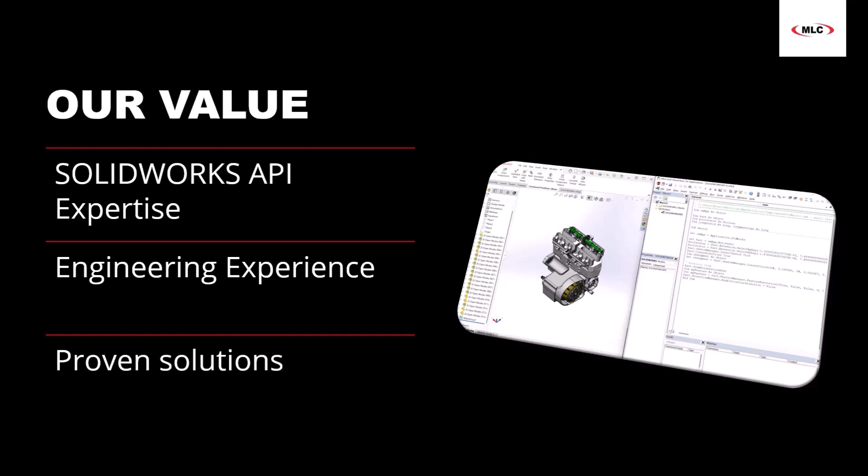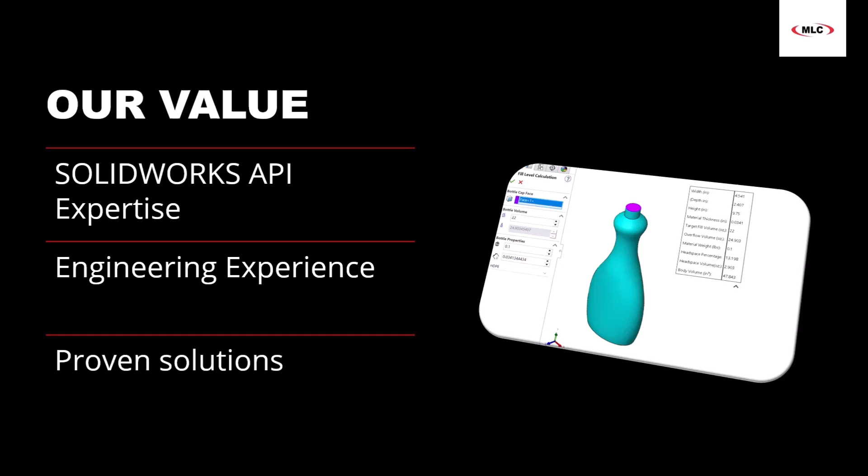At the core of each of these services is a deep understanding of the SOLIDWORKS API backed by extensive database management and software development experience. We don't just build software, we create robust, scalable solutions that align with how your business operates. Ultimately, we're here to help you work smarter, not harder.

When we begin any new project, the first step is setting clear expectations, and this involves a few critical components. Right out the gate, we work with you to determine if there is a proper fit by aligning our capabilities with your specific needs and challenges.

Next, we define the problem clearly. This step is essential to ensure that everyone is on the same page about the goals and the desired outcomes.

Evaluating the ROI potential comes next. We assess the business value of the project to make sure that the investment will bring measurable benefits.

Finally, we aim to build a strong foundation through transparent communication. This is where we establish trust and set the stage for a successful and collaborative partnership. Together, these steps help us create a well-defined path forward and ensure that your project starts on solid ground.

Once we've established a solid foundation, we move into the discovery and alignment phase. This phase is critical to ensure our approach is tailored to your needs. During the needs assessment, we gather all necessary information to understand your current processes and challenges.

Goal alignment allows us to ensure your project goals match your business objectives, setting us on the right path. Defining the scope and objectives involves clearly outlining the project deliverables, timelines, and responsibilities.

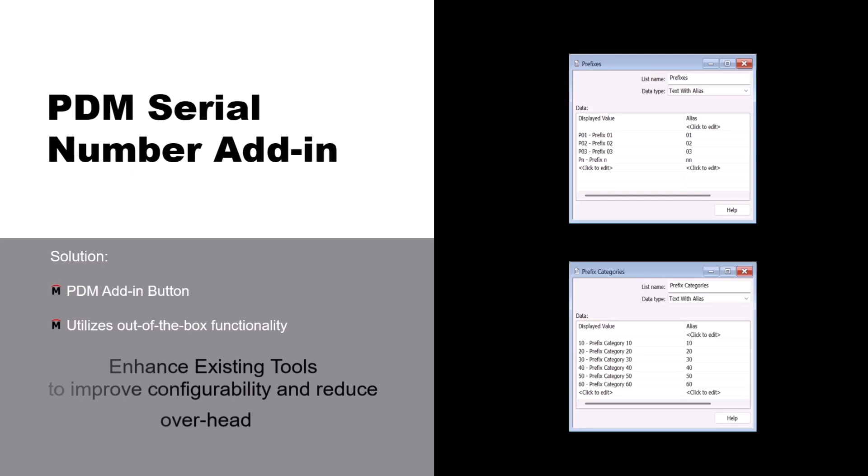We've designed the add-in to take full advantage of out-of-the-box PDM functionality. Instead of relying on fully custom implementations, we extend PDM's existing tools to improve configurability and reduce maintenance overhead. By using PDM's built-in list structures, administrators can easily update and manage the prefixes without having to modify code or mess with configuration files. Admins can adjust numbering schemes directly within PDM, allowing the system to evolve with business needs. Updates are made through the PDM UI, eliminating the need for database modifications or custom programming. By leveraging native PDM functionality, this ensures seamless integration and minimal user training.

A critical advantage of this approach is that it's scalable. As your organization grows, numbering needs may change, but this system can easily adapt without requiring additional work. Since the prefixes and categories are managed using PDM's built-in card list, making changes is simple. If a new prefix is needed, an administrator can update the card list directly in the PDM admin tool, and the new option will be immediately available to users. There's no need to code the updates, so new categories can be added at any time, and changes are applied instantly. Each new prefix in this solution will start a new unique counter for that prefix value.

Moving on to another PDM add-in, this solution is focused on streamlining the engineering change notice process, and we do this by leveraging PDM's task functionality.

Administrators can define which properties get mapped as well, and this allows for flexibility with different ECN requirements. With this level of automation, the ECN documentation remains consistent, accurate, and easily traceable.

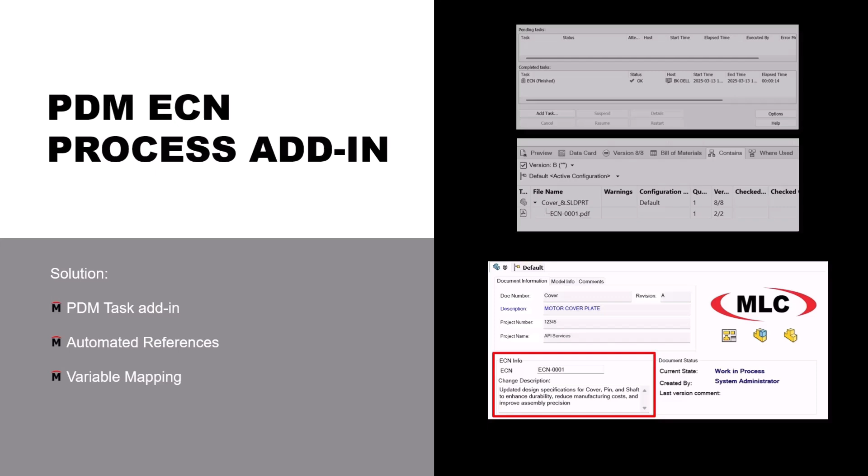By integrating PDM tasks, automated references, and variable mapping, this add-in streamlines engineering change management while reducing the risk of errors.

Now, the last add-in I want to introduce today is a SOLIDWORKS add-in that was designed to streamline a design workflow.

When designing bottles and containers, the volume capacity is a critical specification. Whether it's for beverage packaging, pharmaceutical containers, or even industrial storage, companies must ensure that their designs meet exact volume requirements while optimizing material usage and manufacturability.

Accurately calculating the internal fill volume of bottles and containers is a pretty critical task for the design engineer. Understanding exactly how much liquid the design can hold is essential. And unlike mass or surface area, internal fill volume is not a built-in one-click property of SOLIDWORKS.

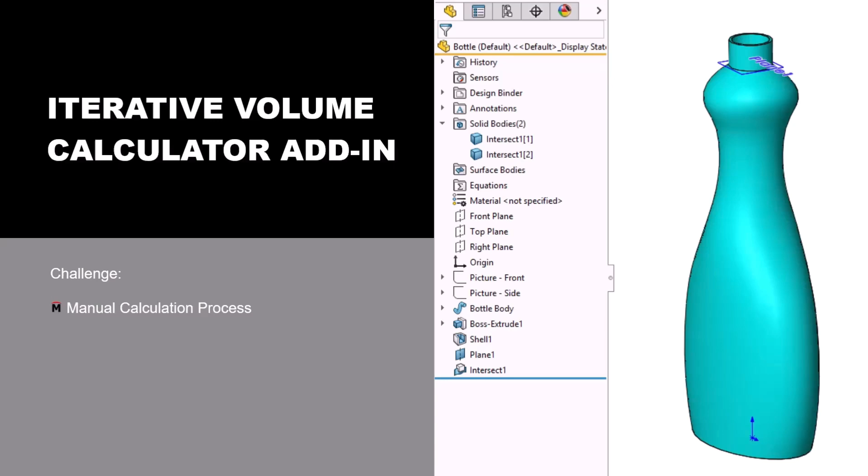Now, you might be thinking, well, what if I use a shell feature, create a thin wall version, maybe use an intersect feature, and we can kind of isolate that internal volume. You can even attach a sensor to it and report back the volume of the remaining body.

But in practice, bottles often feature organic curves and tight radii, which introduces small minimum curvature radius values that make traditional features like shells unreliable. And if shelling fails, users must attempt workarounds such as offsetting surfaces. It gets kind of messy, which adds unnecessary complexity and really slows down those design iterations.

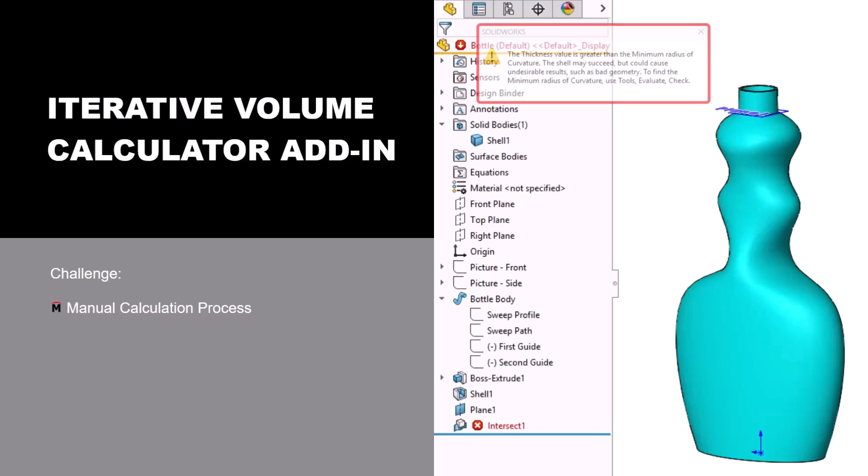With shelling out of the equation, the next option might be to manually calculate the volume using external tools, such as spreadsheets or even equations. However, this approach does have some drawbacks. Transferring data manually introduces the possibility for mistakes that can result in inaccurate volume calculations.

Which leads to the next challenge in bottle and container design: handling frequent design changes. Design engineers often iterate multiple times before finalizing a shape, adjusting factors like aesthetics, manufacturability, and capacity. However, each of these changes requires recalculating that internal fill volume, adding time and complexity to the design process.

With every design modification, users must manually extract dimensions and update external calculations, and that can really significantly slow down the iteration speed. And if changes are not carefully tracked, previous calculations may no longer be valid, leading to incorrect volume estimates. Since manual calculations rely on user input, every adjustment introduces one more opportunity for data entry mistakes.

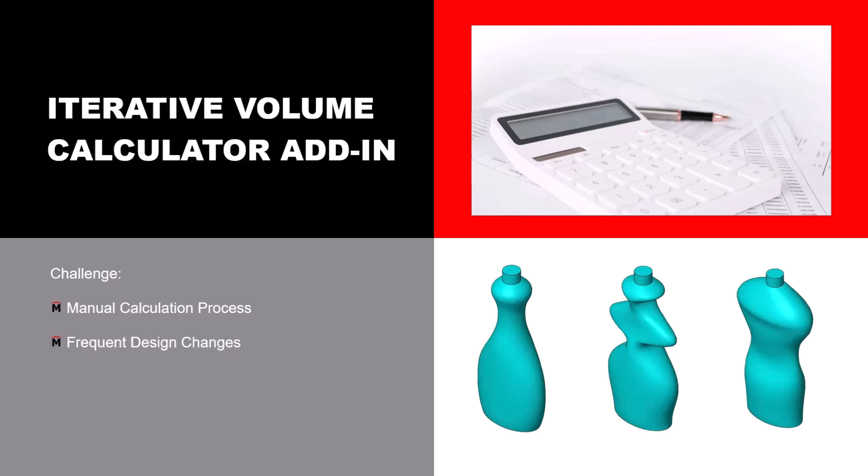To address the inefficiencies of manual calculations in frequent design iterations, this add-in takes a model-driven approach. Instead of requiring users to extract values manually or rely on external calculations, the tool dynamically calculates key properties based on the actual model geometry. Simply by selecting a face on the model, the add-in automatically retrieves information such as volume, width, depth, height, and previously specified user goals. A structured callout box appears in SOLIDWORKS, presenting the extracted values for immediate reference to the user.

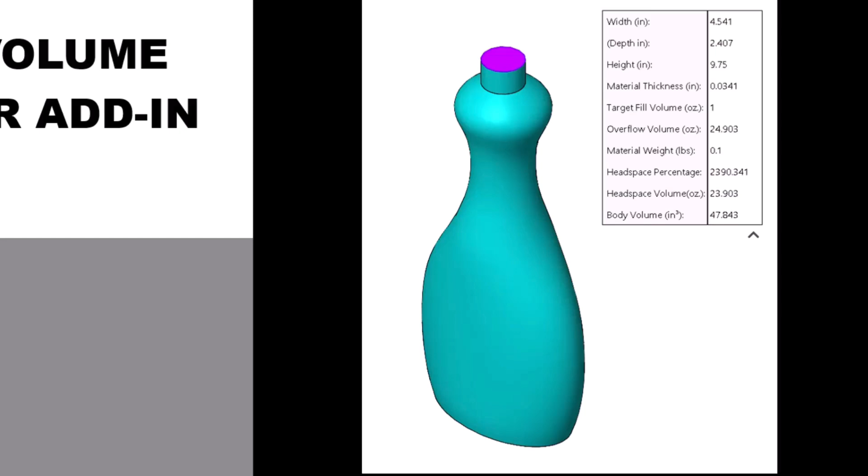Calculations are derived directly from the SOLIDWORKS model, helping eliminate user error from manual data entry. There's no need to switch between SOLIDWORKS and external spreadsheets, especially when values update as the model changes. Engineers can quickly adjust their designs and see real-time feedback on volume and material usage.

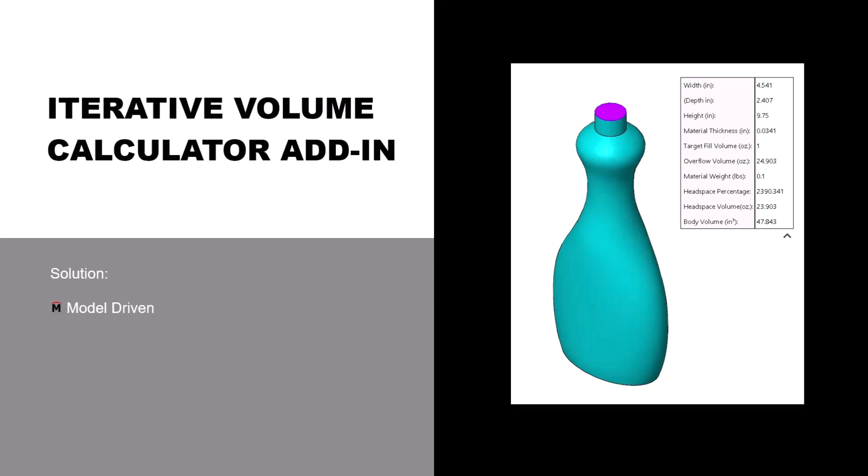To further enhance this add-in's usability and ensure seamless integration with the SOLIDWORKS workflow, it creates a custom feature in the design tree. Instead of being a one-time calculation, this feature remains embedded within the model, allowing design engineers to access and update volume calculations as the design evolves. It appears just like any native feature in the SOLIDWORKS interface, which is intuitive for users familiar with the application.

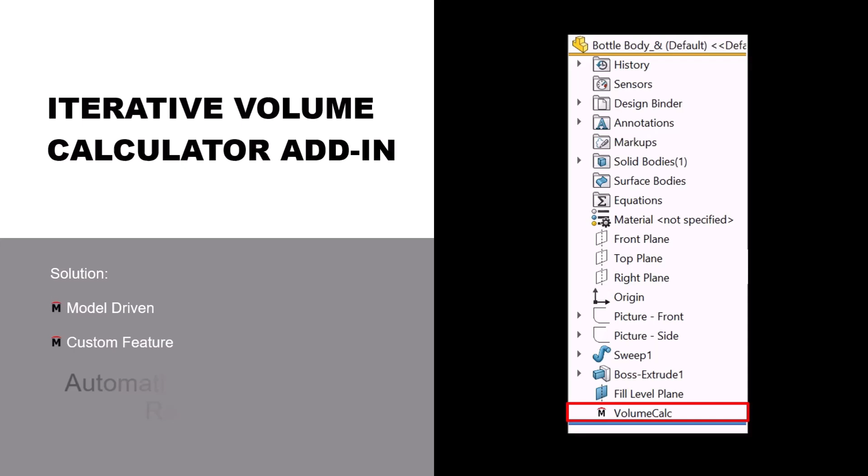This feature also preserves critical inputs such as the selected face and material selections, ensuring engineers don't need to reselect the parameters each time the calculation is made. And since it's part of the model history in the design tree, when the design is modified and a rebuild is executed, the VolumeCalc feature automatically rebuilds and recalculates our goals.

When it recalculates, it provides live feedback to the design engineers. Instead of performing these calculations manually, we actually see the reference plane update position based on the newly calculated fill height. By maintaining a live reference to the target fill level, engineers can ensure the design meets capacity specifications without exceeding or undershooting limits.

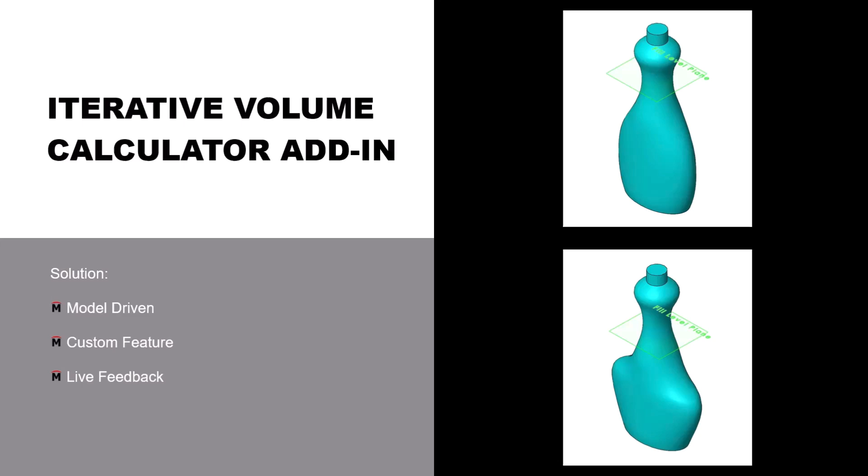Now that we've walked through each solution, let's take a look at the specific business outcomes that each add-in delivers. These solutions were designed to eliminate inefficiencies, streamline processes, and accelerate engineering workflows, all while seamlessly integrating into SOLIDWORKS and PDM.

Managing smart number schemes manually can be tedious and error-prone, requiring manual tracking and updates. The add-in automates the assignment of structured, unique serial numbers, ensuring consistency across projects, reducing the time spent managing part numbers and allowing engineers to focus on design rather than data entry.

ECN processes often suffer from inefficiencies due to manual approvals, file relationship tracking, and inconsistent workflow conditions. With our add-in, we ensure proper file relationships and workflow conditions are enforced, reduce human error, and maintain traceability with our task add-in. This task add-in also automates variable linking between the ECN form and the affected items, which prevents incorrect or missing data from your ECN document.

And lastly, we saw teams manually calculating internal fill volume, maybe using external spreadsheets or a shell function which may fail due to geometric conditions. The add-in removes the need for any external tools by embedding volume calculations directly within SOLIDWORKS, and these update dynamically as the model changes. With this live feedback and persistent feature in the design tree, engineers can quickly validate volume requirements without manual recalculations.